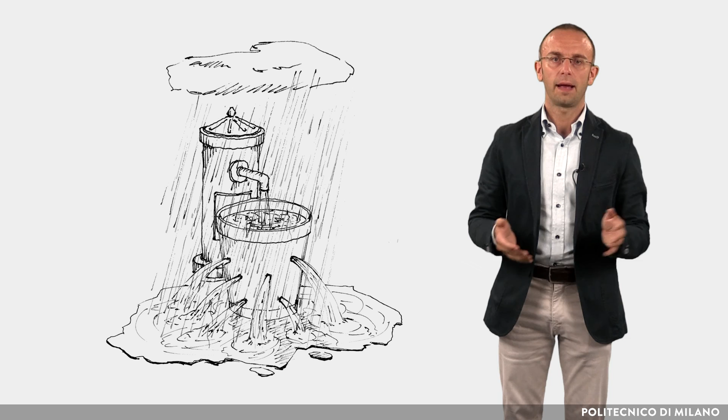If we imagine a bucket with holes in the bottom and in the sides, we know that if we fill it with water and we want to maintain a certain level, we need to provide as much water as it loses. Likewise, to maintain a certain temperature inside the building in a cool period, since there are heat losses, we must provide as much heat as it loses, and this is done with the heating system.

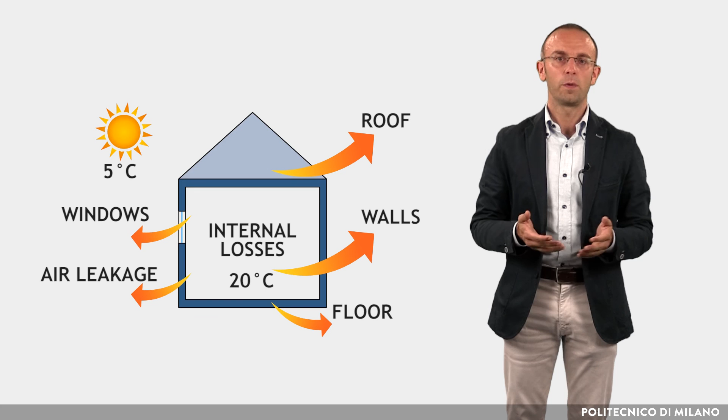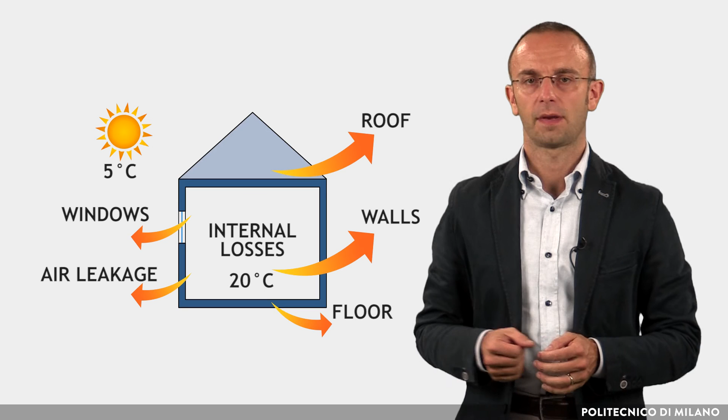The holes of a building in winter are the transmission heat losses through the envelope and those due to air infiltration and ventilation. Actually, there are not only losses in the relationship between the building and the environment, there are also solar gains, as if the bucket was placed outside, where the rain helps to fill it. To these gains, the internal gains, which are the heat produced by the occupants, lights and equipment, must be added.

In summer, things go in a similar but opposite way, as in a boat with leaks in the hull. To keep the boat floating, water must be pumped out. This corresponds to the building in the summer, when the heat penetrates and you have to pull it out with air conditioning. The penetration takes place through walls, roof and windows, and through infiltration and ventilation.

In this case, there are also solar gains, but they now do not help. On the contrary, they tend to increase the temperature of the environment, in the same way that rain would fill the boat faster, raising the water level.

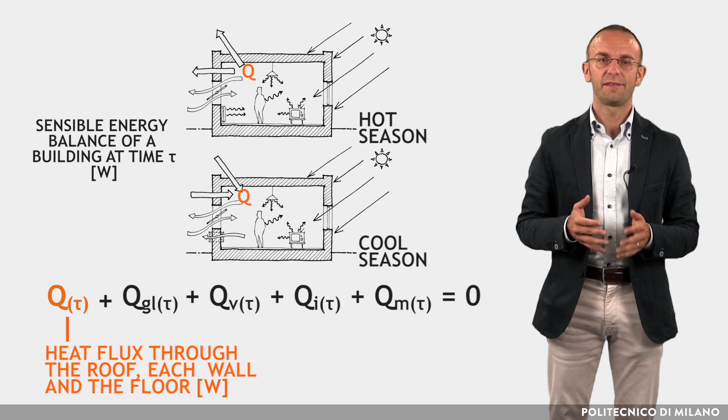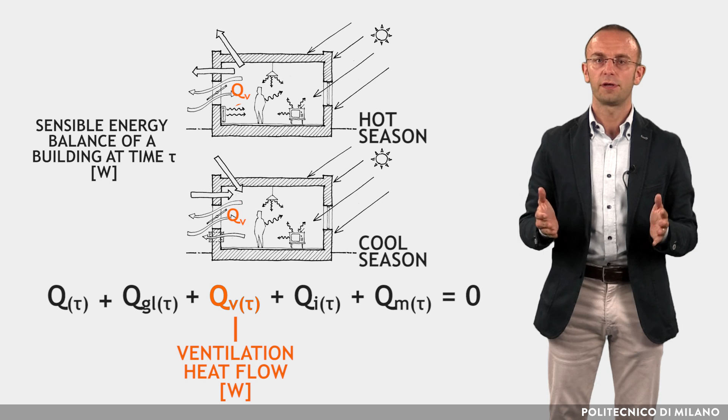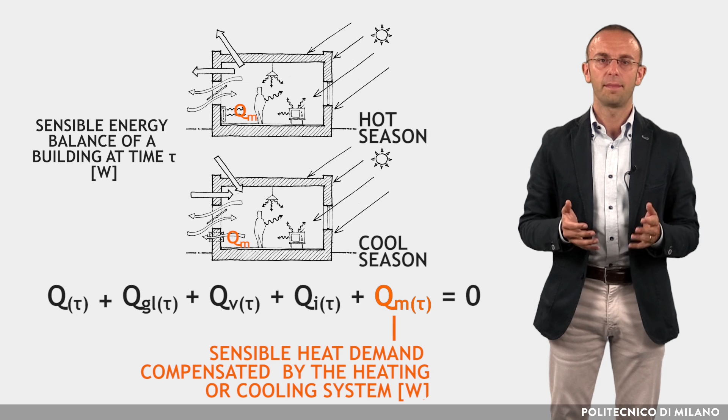The sensible energy balance of a building at time tau, expressed in watt, can be solved according to this equation, where Q(τ) is the heat flux which flows through the roof, each wall and the floor. QGL(τ) are the heat gains through the windows. QV(τ) is the ventilation heat flow. Qi(τ) are the internal heat gains due to people, domestic appliances and equipment. Qm(τ) is the sensible heat demand compensated by the heating or cooling system.

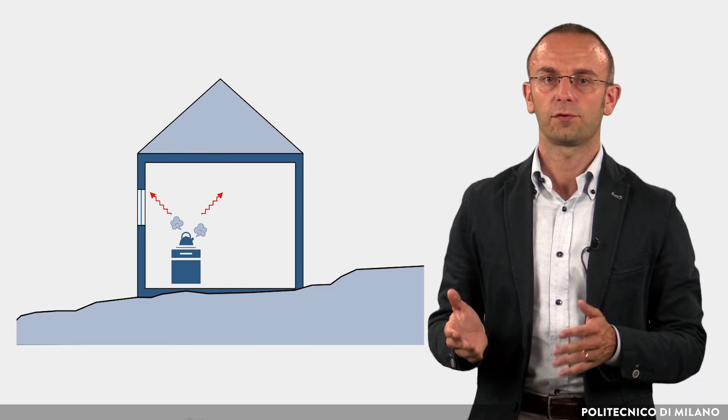Thus, in general, the energy balance of a building envelope regards the thermal energy flows required to maintain the desired condition of temperature and humidity in rooms. The architectural choices are crucial for the part of the balance that covers the sensible heat, which is that correlated to a temperature variation. The balance of the latent heat, which instead is that released or absorbed when the water, contained for example in the air, changes state, depends only on the internal sources, people, plants and kitchen, and on outdoor air conditions. Thus, the envelope characteristics have no influence on it.

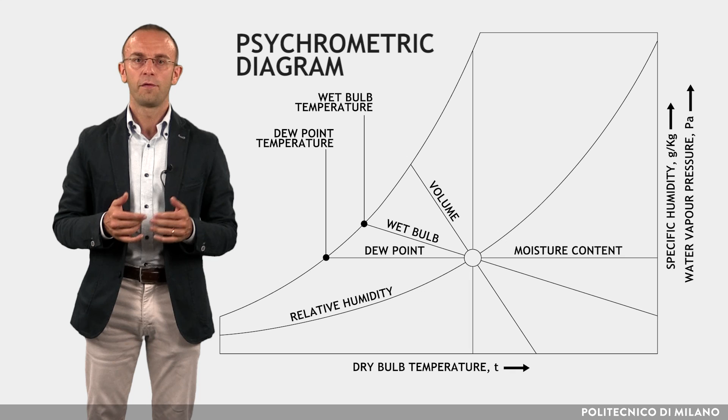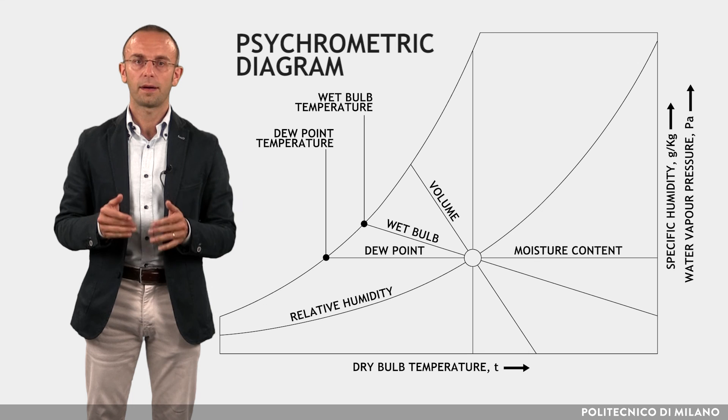To better understand the thermodynamic processes involving sensible and latent heat, the psychrometric diagram can be used to represent most air properties through a data pair, which can be, for example, the dry bulb temperature and the humidity ratio, the dry bulb temperature and the relative humidity, or the dry bulb and the wet bulb temperatures. Given a pair of these values, it is possible to read all the others. Therefore, a point marked in the diagram represents the condition of the air at a given place and time.

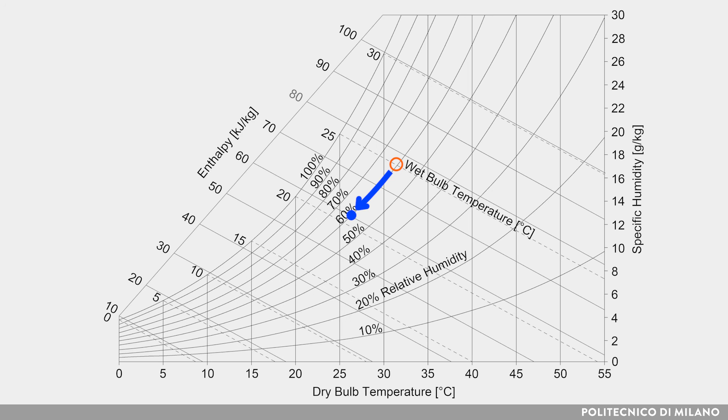For example, if we cool the outdoor air initially at 32 degrees Celsius and 60% relative humidity and bring it down to 26 degrees Celsius, the resulting process in the psychrometric diagram is represented in the figure. The process is called sensible cooling and is associated with an increase of relative humidity. To cool the air maintaining the same relative humidity value, water vapor must be subtracted from the air, as indicated in the figure, in which about 5 grams of water per kilogram of dry air are condensed. The process is called sensible cooling and dehumidification.

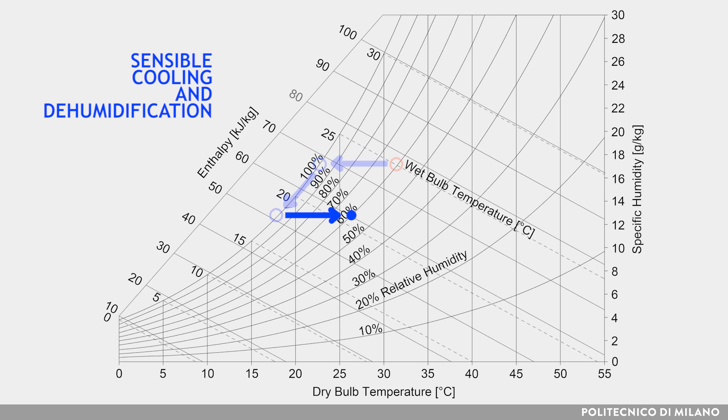The sensible cooling and dehumidification transformation actually occurring in air conditioning systems is the one indicated in the figure. It involves the cooling of air to reach the saturation curve and moving along it to the point where the required amount of vapor is condensed to achieve the desired relative humidity. Finally, the air is heated to the final set point temperature. The total heat required to perform sensible cooling and dehumidification is called enthalpy, which is equal to the energy that has to be supplied for each kilogram of treated air.

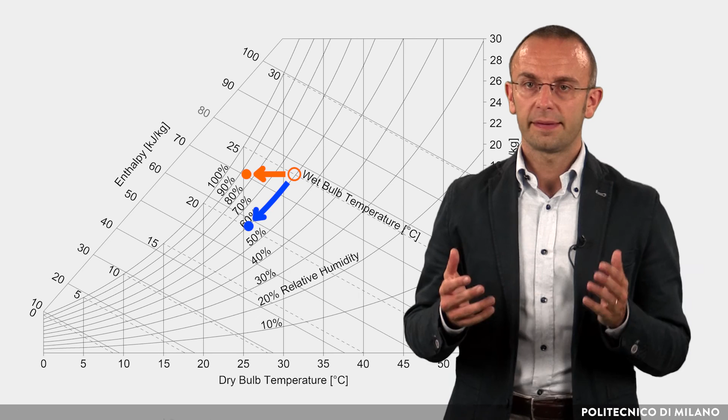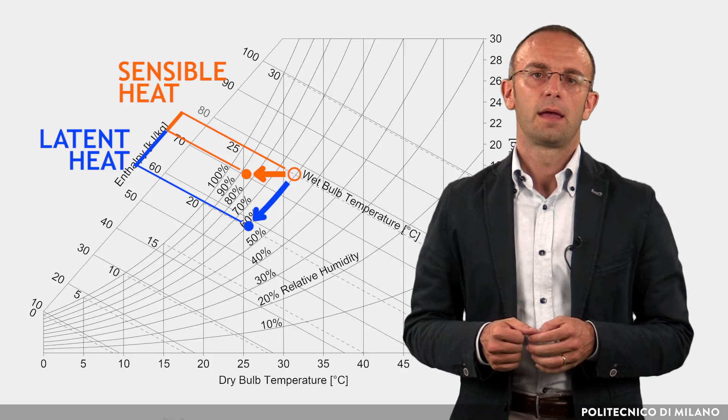By analyzing the psychrometric diagram, it can be seen that in air conditioning, the subtraction of latent heat, which corresponds to the condensation of the water vapor, requires more energy than subtraction of sensible heat, which is related to the temperature decrease. In conclusion, the total energy balance of a building has to take into consideration both sensible heat fluxes, which are mainly related to architectural choices, and latent heat fluxes associated with humidification and dehumidification processes.